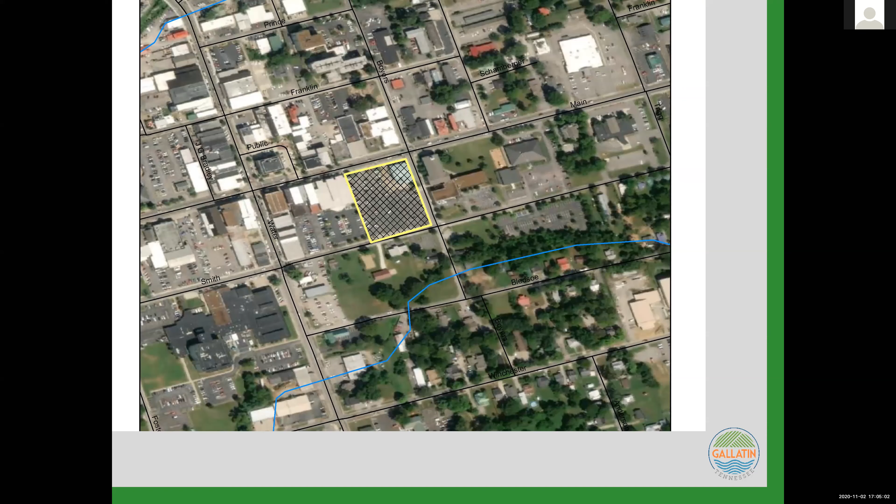Yes, I am. Please go ahead. Yes, this is the site plan request for the Sumner County Courthouse to be located near the downtown square. This will be located next to the library where the current parking lot is for one of the adjacent churches.

This will be a 5-story building. It will be predominantly brick construction. The applicant did go to the BZA last month to request a height variance, and that was granted. This is the site plan that you see in front of you with the footprint of the building, as well as the improvements that will be done in front of the building and along the sidewalk. That also includes a crosswalk across Main Street and some additional crosswalks along adjacent streets as well.

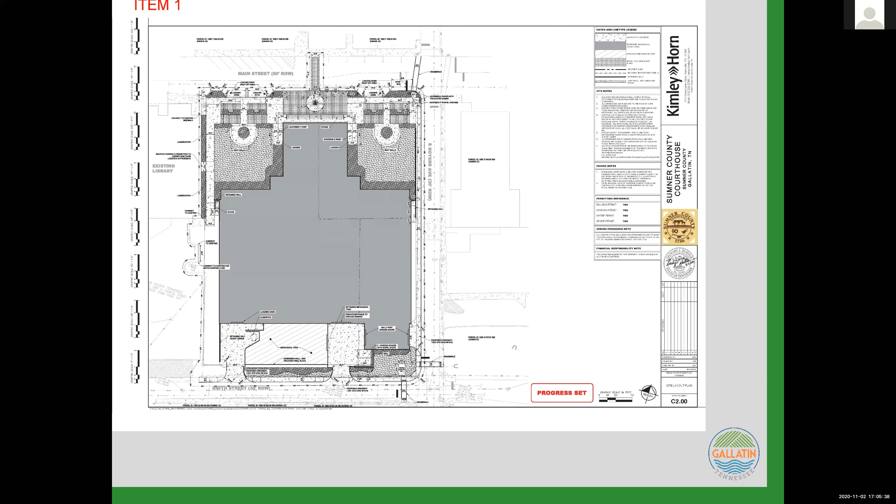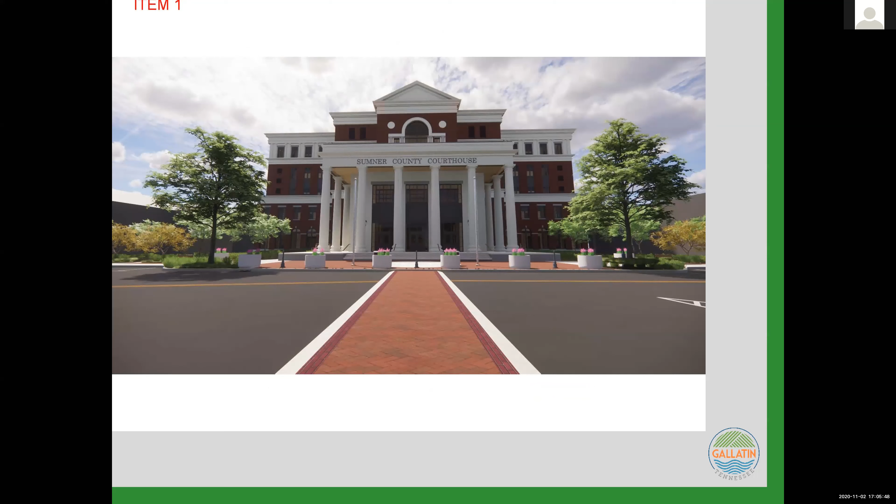And then the site will be heavily landscaped as well. So they did provide some renderings of the new courthouse. Again, it is a predominantly brick building with front-facing columns. And here are some elevations as well.

And this is for site plan review at the Planning Commission. If you have any questions, I'm happy to answer them.

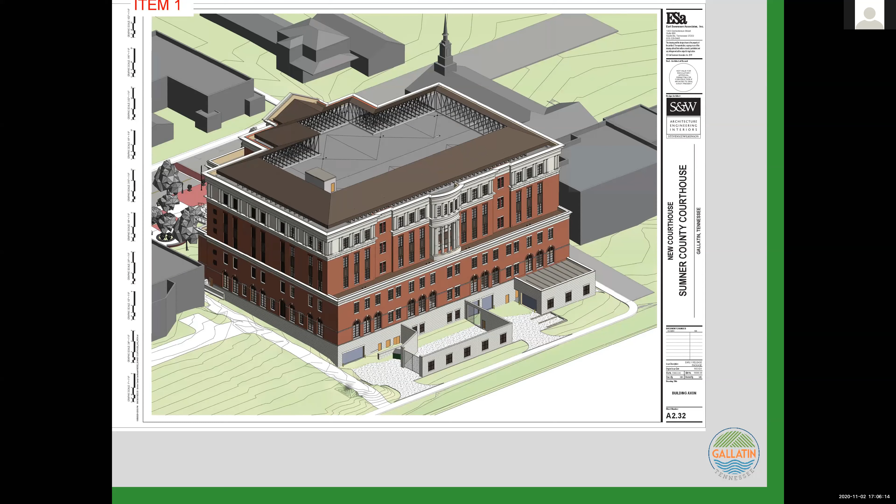Thank you, Jillian. Do we have a representative for the applicant present online? Randall and Zach, your lines have been unmuted. Thanks, Josh. Mr. Chairman, this is Zach Dufour with Kimley Horn, the civil engineer for the project. I think we have Wendell Brown, the architect, and Randall Coy, the project manager for the county, all on the line to answer any questions that you may have.

Thank you, Zach. Any questions from members of the commission?

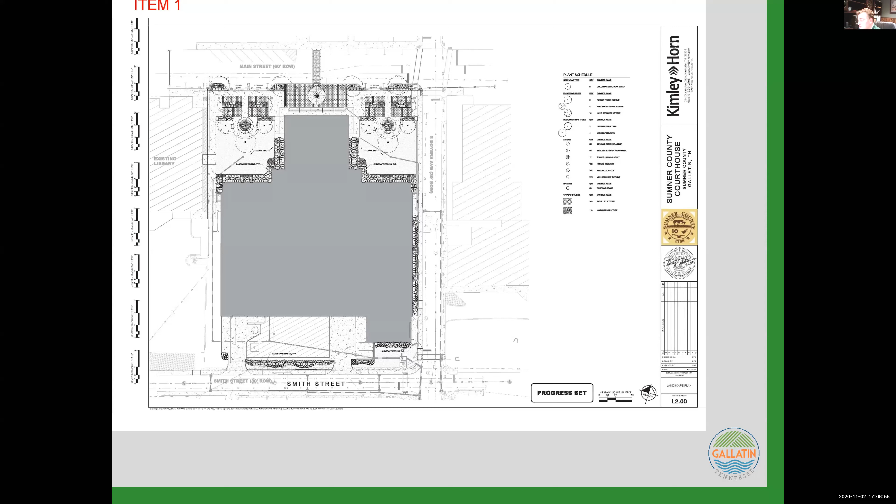I'll just lead off the discussion by saying we reviewed this at BZA, and it is just a phenomenal project, and I'm so excited to have it here in Gallatin. It is tall, but they've thought of every detail, and one of the things we looked at the BZA is they've even taken into consideration the light that will stream into the stained glass windows of the First Baptist Church, and they've set the building back far enough to make sure that the height of this building doesn't impede that light coming into the neighbors. So I think it's a great project, but let's hear from other members.

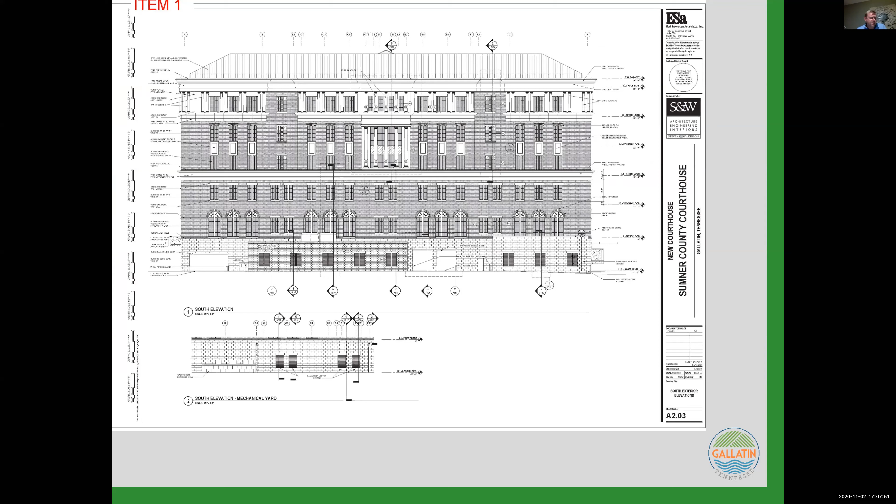Chair Pereira, I'll echo your comments. I've followed this through the process and watched it through BZA, and I don't have anything negative to say about the project. I think they did a great job getting it on the site. I'm glad to see it's positioned farther back from the road so it doesn't affect the adjacent neighbors. So I'm looking forward to seeing this come to Gallatin.

I concur with both. It's a good looking project. I think it looks good. Looks like it might be a tennis court on top. Is that right?

I can honestly say I spent some time reviewing this and looking through, trying to find something to ask for clarification about. And it's probably one of the more comprehensive sets of plans I've seen at this stage. So you guys did a good job on it.

Thank you, I appreciate that very much. Appreciate it.

Mr. Chairman, I just wanted to add that we have received comments from staff on our initial submittal. We're in the process of going through those. Most, I'd say about 90%, are easily addressed and we have no problems with. There's a couple I'd call them more just clarifications that we want to have a conversation with staff about, but I don't think any of those are major, certainly some minor comments. We just want to make sure we understand what the staff is looking for. So for the most part, we're in agreement, and we hope that we can get in touch with some of those departments this week, and by the time we come to the Planning Commission for the actual meeting, should have all that worked out.

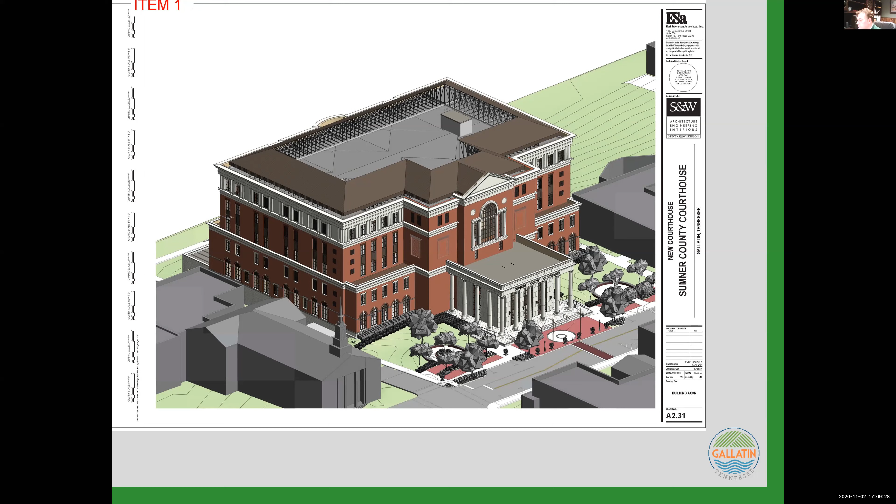So I'll just have a question, having not seen the staff report yet. Does this site, this question is for staff, does this site have underground stormwater retention, or does it fall under the square footage footprint that requires that, or below that threshold?

Mr. Preer, this is Nick with engineering. Because the existing site was all completely impervious, they're actually adding some green area as opposed to taking some away. So we were comfortable in allowing no detention to be required on this, because they should actually be improving the situation. They are doing something a little bit different on the water quality side of things, where our requirements are for 1 inch runoff reduction, meaning the first inch of rainfall is captured and controlled and held on the site. Because of the location here and the existing conditions, we were comfortable going to the alternative, which is in our ordinance and is allowed, and that is what's called 80% total suspended solids removal. So that means at the southeast corner, down at the corner of Smith and Boyers, there is a water quality unit, a pretty significant size unit, that will be capturing and filtering all the stormwater generated from this site before it goes into the storm sewer system and then onto the creek.

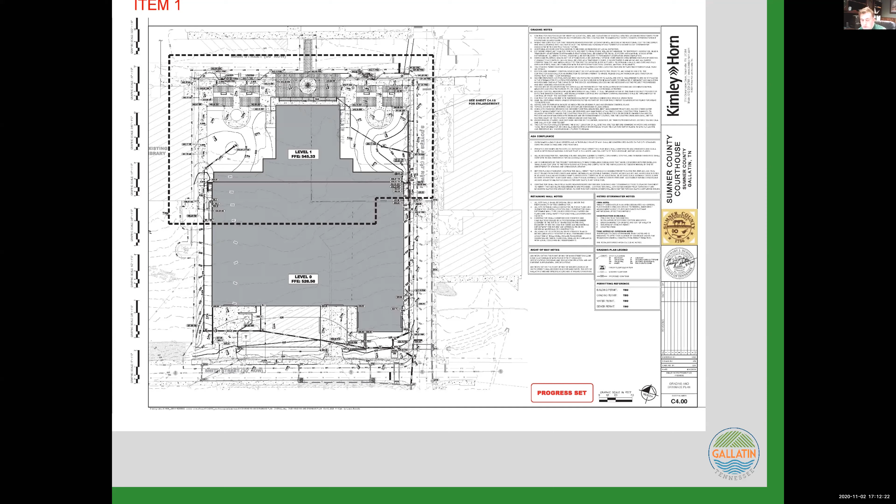Well, if there are no other questions, then this project looks great. We look forward to seeing it back in a couple of weeks, and we're excited to have it on our main street in Gallatin. Thank you. We'll move on.

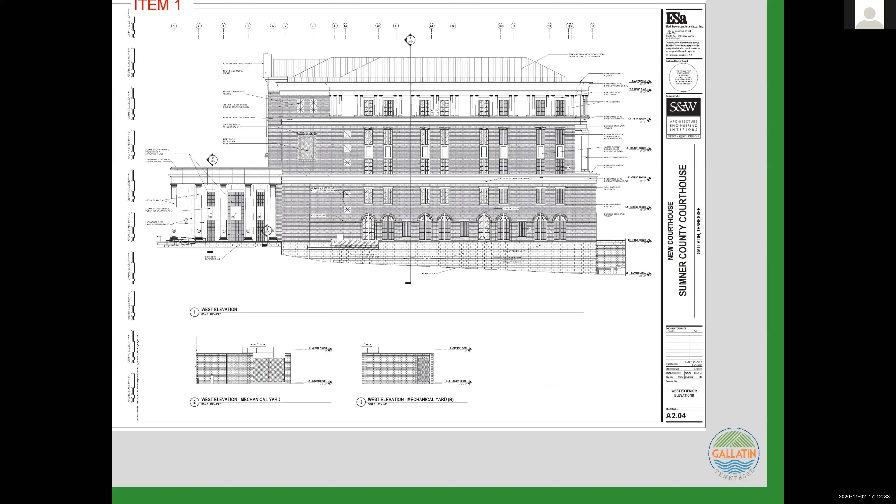Comments. Thank you, we'll move on to item number 2, which is 1160 Nashville Pike. It's an FMDP. Dustin, you're handling this item? Yes, Mr. Chair. Next slide.

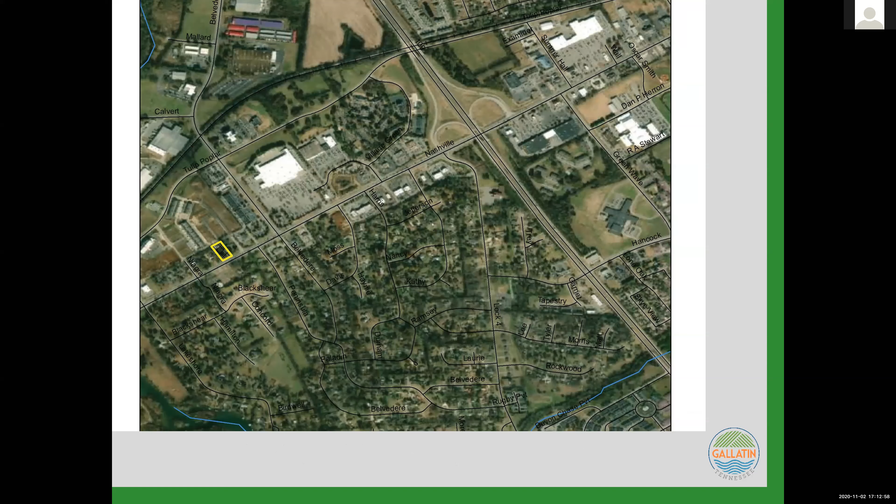So this is going to be a final master development plan for 1160 Nashville Pike. It's on the north side of Nashville Pike, and it falls under the Nashville Pike corridor overlay. Next slide.

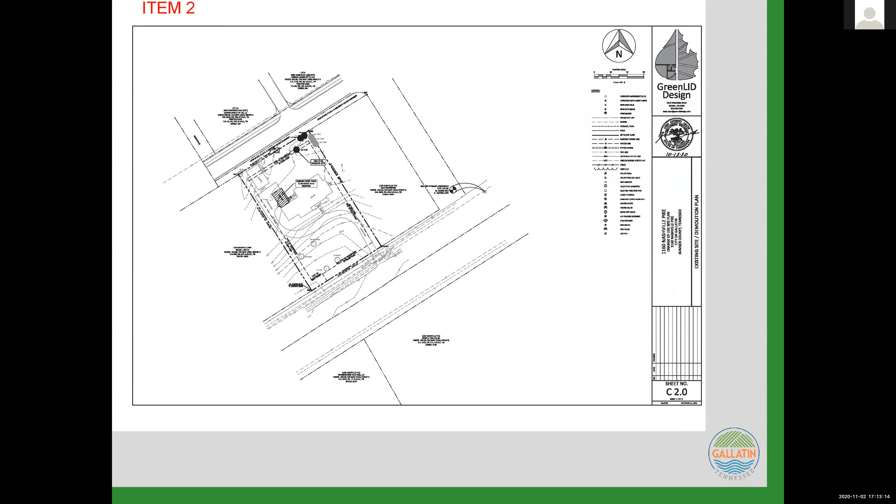It's going to be a conversion of a former residence into an office space. You can see here, this is the existing site, and they've marked out the carport and some of the trees they're going to be removing. Next slide.

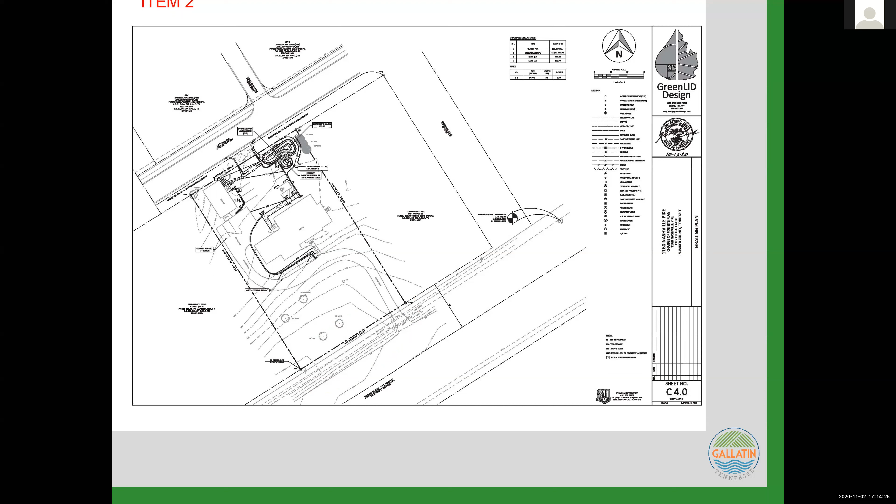Thank you, Dustin. Do we have a representative for the applicant present? Andy, your line's been unmuted. I'm here.

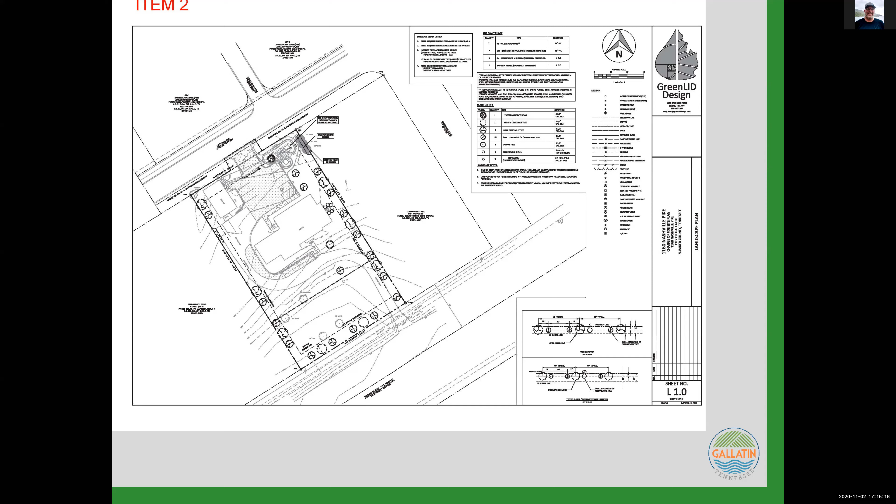As Dustin presented, and we've reviewed the comments, we still obviously would like to petition the Planning Commission to allow that drive entrance. We don't really see any issues with the other comments that were mentioned. I spoke to the owner today, and we're going to try to decrease some of the impervious area between now and when we turn back in. That has nothing to do with the drive off Nashville Pike, but as far as engineers' comments are concerned with stormwater, we are going to try to get the parking in more alignment with the square footage of the building and not do as much work out front.

Thank you, Andy. I'll just lead off by saying we haven't officially adopted that tree ordinance we've been talking about yet, but this is one of those sites with a lot of nice existing trees, and a really great benefit of this project and the use it's being put to is that it's preserving that tree canopy in front. So I'm really glad to see that happen.

But I'll open it up for comments or questions from members of the commission about the project. Anyone?

Yeah, go ahead. Actually, I was going to say, Chair Pereira, just for the record, I'm recusing myself from comments on this property. I have an interest in this project, so it would not be appropriate. Certainly, thank you, Mr. Harris.

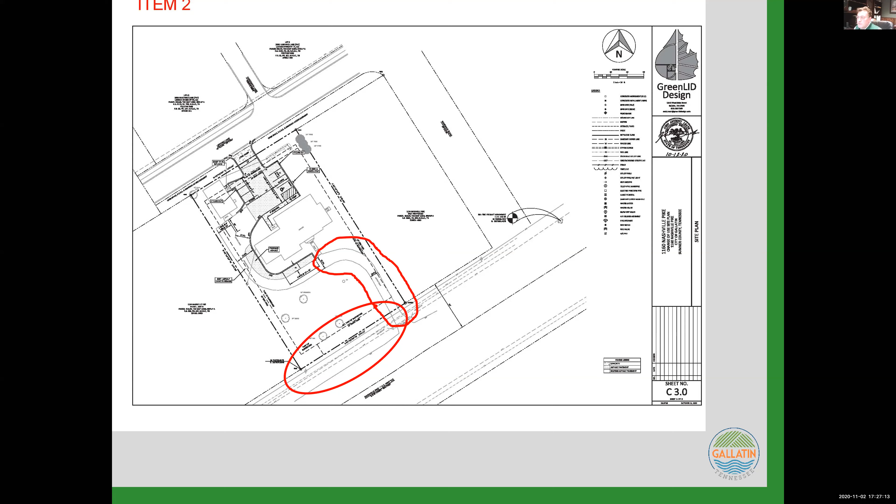Do we have any other questions or discussion? I think the purpose of this meeting is to give the applicant or their representative some direction on what to bring before our meeting. We don't have to—this meeting is meant to educate us and let us study the items beforehand. Does anyone have additional comments? No, I don't have any. Okay, none. It appears we just need to mull this over and think about it before our meeting in a couple of weeks. We'll give it some thought. Thank you for bringing it to us, and we'll see it back in a couple of weeks.

Item number 3 is Gallatin Industrial Center, Phase 4, a preliminary plat. Jillian, you're handling this one? Yes, and item number 4 is the final plat, so I'll discuss these together if that's all right. Sure, okay.

This is for the Gallatin Industrial Center Phase 4, the Wool Hawk/Facebook property that was included in the annexation and rezoning that occurred earlier this year. This is for a little over 800 acres. They will be splitting the property and moving the property lines to create 11 parcels, in order to dedicate the right-of-way for the extension of Gateway Drive to Hartsville Pike. So this is just platting to establish that right-of-way predominantly and reconfigure some of the property boundaries—this is both the preliminary plat and the final plat.

Thank you, Jillian. Do we have a representative for the applicant present? Yes, this is Brad Simpson with Barge Design Solutions. Thank you, go ahead, Brad.

As Jillian said, this is just to clean up where some existing or previous property lines were, remove those, and where the roadway is being proposed, it will bisect some of the other properties, so we're making sure we're cleaning those up and addressing them. Lot 8, in the southeastern area, is where the GPU lift station will be located—there are no other proposed developments for the other adjacent lots, it's just to clean things up and make the site more coherent. Also, lot 9, in the middle, is just for the TVA substation—they asked to own the property their substation is on.

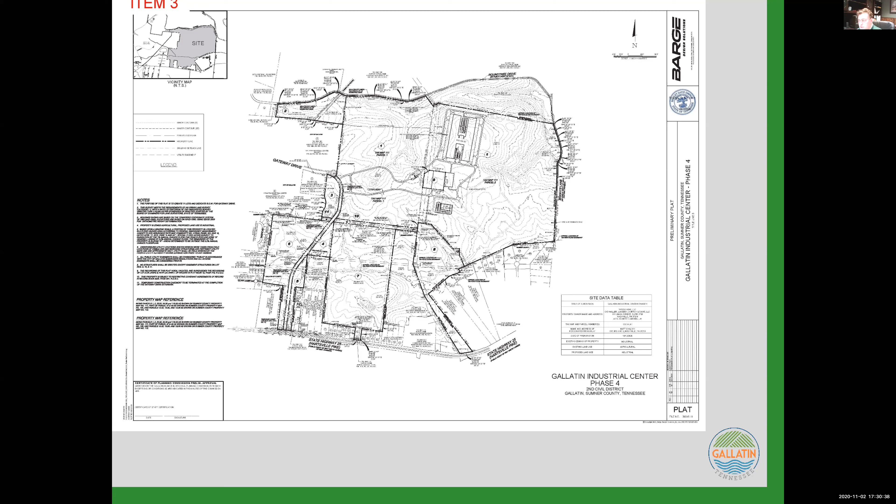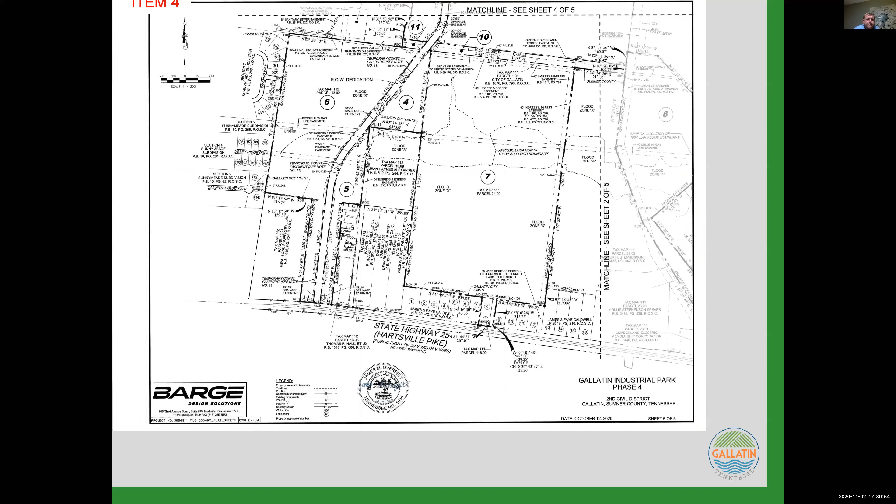I'm sorry, well, this is obviously an incredibly exciting project. Questions for the applicant or for staff? Anyone? I didn't see anything on this, it looks pretty straightforward. I agree. Alana, anything? I also agree. No. Mr. Will? None. Well, seeing none, then we'll move on.

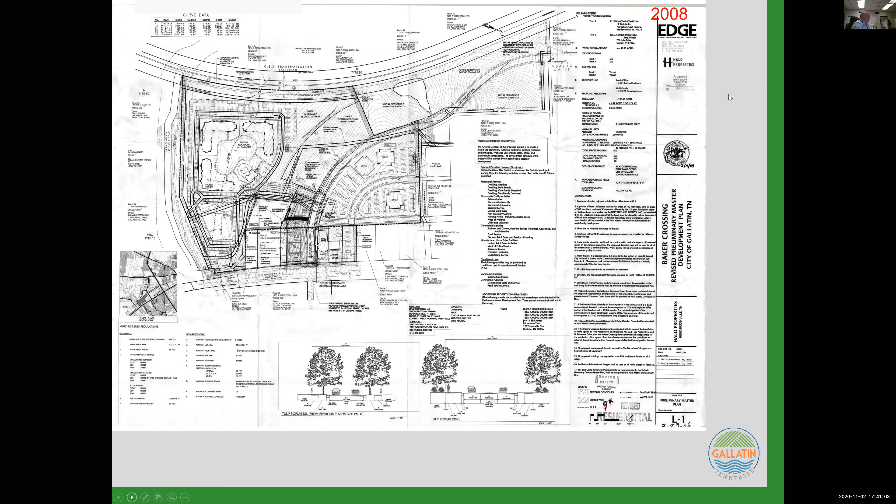To make things more complicated, shortly after this plan, the initial plan was approved, another plan came in as an amendment, and Jillian might have that one. Okay, if you can switch over, advance. Okay, I guess this was the second plan that came in. It was an amendment to that first plan. Remember, the first plan, all it had was a note that said you're entitled to X number of units, and I think it was 478 units. This plan came in a couple of years later, and specifically identified a layout for the apartment complex.

And you see they had some very large buildings back there on the westerly portion of the property, and it crossed over into the flood zone. You can see the elaborate drainage lines and the parking lot and all that kind of thing.

So that plan got approved with 358 units, but only 290 of those units were in this portion that got amended, the little arc along the back side of the west side of Tulip Poplar Drive. Jillian, can you mark that with your cursor? There you go, right there. That whole area was kind of held in reserve, and it was not amended.

So there were 68 units in there identified as phase 2 of this development. Those were the 68 units originally identified in the original plan when they totaled up the number of units. So in this case, they had almost a 2-phase development for apartments on the west side, and this 68 held in reserve. And that's reflected in the notes on the right side of the plan as well. So that one got approved that way.

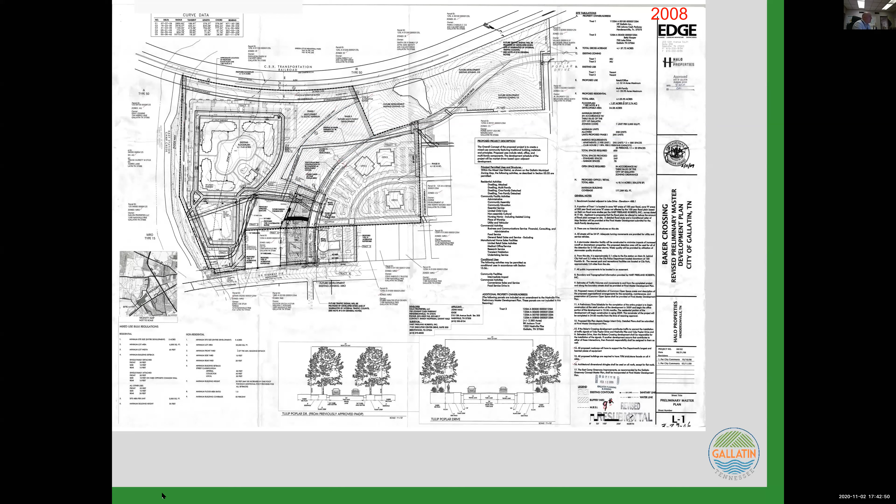And then in 2011, we can flip over there. Working on it. A couple of years later, they came back in and did something a little bit different, smaller and more numerous buildings, generally still in this western half of the area, in a lot footprint that was even a little bit smaller than the previous one.

But they didn't amend that portion where the 68 lots on that arc adjacent to Tulip Poplar were, so it was part of the original previously approved plan. Now, this tract 1A above did get amended, and it's real unclear as to what that tract 1A is. There is a chart on the right side of the plan, and at that scale you can't read it, but it didn't assign any residential units to that.

So tract 1A, I don't know what they intended to have there. It's possible they could have put whatever would work in MU behind the phase 2 units held in reserve, those 68 units. So what we had here was 297 units shown graphically on the west part, plus the 68 units reserved, which were never amended from this previously approved plan. This was the Tennessee Hills done in 2011, I believe.

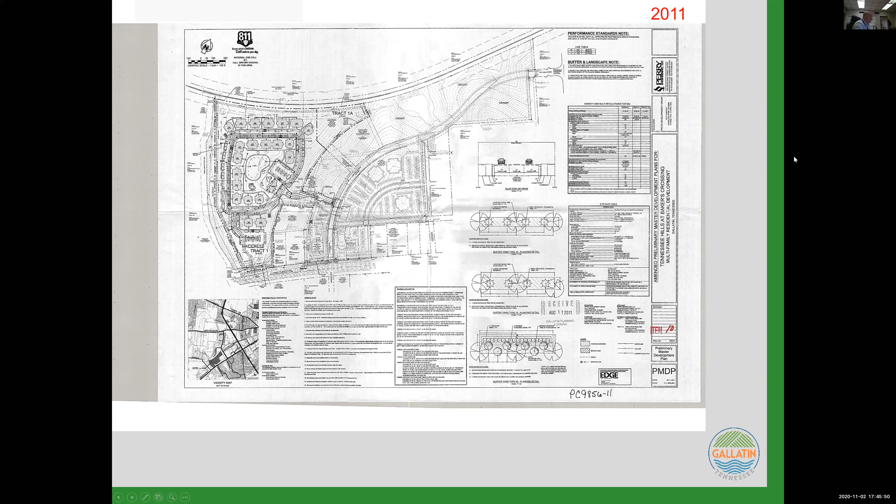So what they proposed at the last meeting you reviewed was 264 units, which included that reserve area, those 68 units. Previously the last plan reviewed had 252 plus 68 units, so 320 units were essentially vested based on the previous units. Now they've broken it down to 264.

And as you've heard tonight, they even considered reducing it to 252, because they were going to reduce the height of the building along Tulip Poplar, so that took a few more units out. So this is at least not an increase in density of these buildings. One thing we'll need to look at is the proximity to the R20 zoning, because there is a buffer yard required between those two uses, and they may need to modify that to correct the buffer yard between those two uses.

So we're looking at a decrease in density in units per acre and raw number of units, because the acreage is modified a little bit. Y'all cited 3 conditions as reasons why it should be elevated to a major amendment. One was density, which no longer comes into play here unless the attorney's office tells us differently. I don't think it comes into play either way, because that portion of the property is not subject to the rezoning like the easterly portion. That's suspect at this point. The other two items were architecture, which I'd determine was a substantial change, and grading changes that would occur on the property.

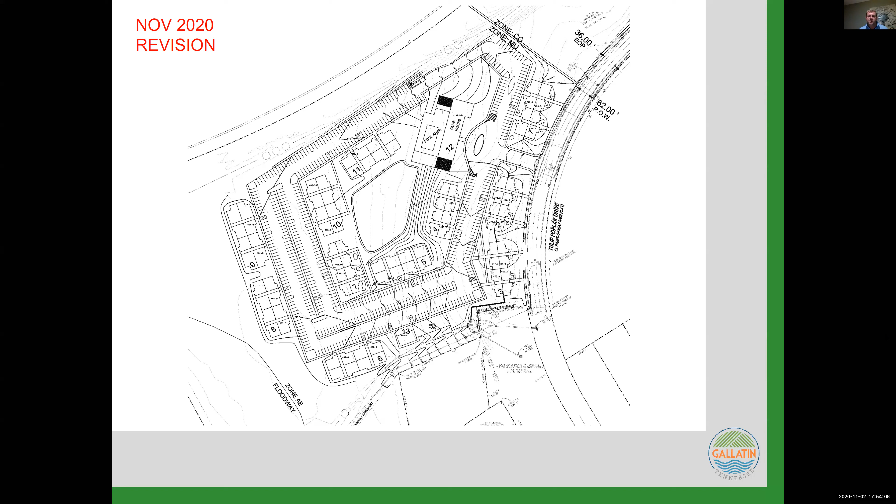My comments on this—obviously at the last meeting, I didn't feel this needed to be a major amendment on the point about the increase in density for the units. If the applicant's decreasing the number of units, I have even fewer concerns about it. As for the architecture, the original plans were multi-story apartment buildings. I think while this proposal is an improvement, I still don't see that it was a substantial change in the architecture. It didn't go from 1-story rental units to 3-story rental units—that would be significant. Some of the character maybe changed a little bit, but the intent and spirit of the buildings didn't really change that much. They've always been apartment buildings, so I didn't have a problem with that at all.

So now getting to the zoning and all the things for the planning department, how that affects it—like Mr. Brewer said, that's going to take a minute to digest and see. But on the surface, I felt like this should have been a minor amendment all along. So I don't have a problem, if it now even more so meets those requirements, to see it go that way at the next meeting.

We have— go ahead, Bill. I just wanted to mention, depending on what action comes after the discussion tonight—they said they're in a hurry, I didn't realize they were in such a hurry. It doesn't have any bearing on what we do here, but this item is scheduled, as y'all had recommended, to go to the City Council Committee on November 10th. So what we'll be presenting to them on November 10th is y'all's recommendation.

I don't know how council committee will want to address it, but the applicant certainly has the option, depending on where they think this modification is going, to assume someone would make a motion and there would be a 5-7 vote, because it would require a 2/3 vote. You'd have to have at least 5 to meet that 2/3 vote for reconsideration and to rescind the previously approved resolution. But if that's the way y'all wanted to go, the applicant might elect to defer action before the City Council Committee until y'all made a consideration for reconsideration of another resolution.

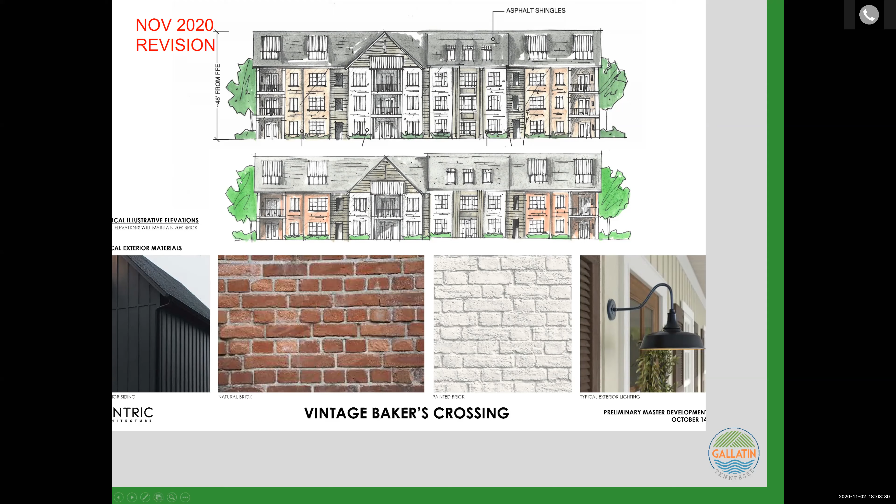Very good. Any other input from members of the commission? That's good. All right, then we'll move on to the last discussion item, which is the fence, walls, and hedge regulation ordinance discussion.

Yes, Mr. Chairman. I put this back on the agenda for discussion because at the last meeting y'all had deferred action on this, and I got the feeling you wanted to talk about it in more detail without spending a lot of formal meeting time. So to remind you a bit about what we're proposing: change our fence and wall regulations to allow taller fences in certain circumstances where residential lots are adjacent to commercial or industrial lots, or multifamily residential zoned properties where there's a multifamily development adjacent to it. The main issue of discussion was that fences and walls built 7 feet or greater in height have to have a structural permit from the building department, requiring more review than just a fence permit for location on a lot.

We also wanted to make sure that structural facilities, whether a wall or fence that are 7 feet or higher, could not be placed in a public utility and drainage easement, because essentially they're permanent type structures. A fence that's 6 foot tall, shadow box type, can fairly easily be removed from an easement, but a wall or structural fence could not. So there's the big difference there.